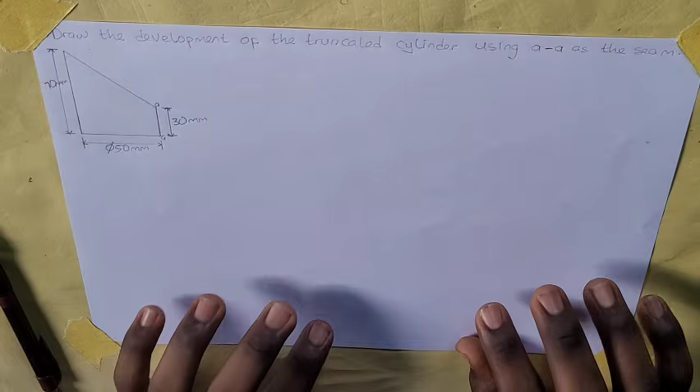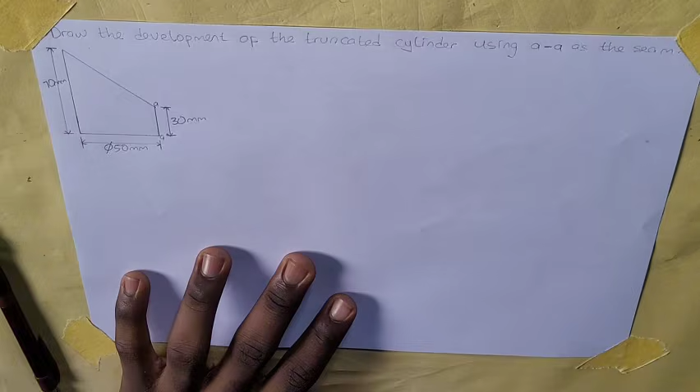Today we are going to look at the development of a truncated cylinder. A truncated cylinder is a cylinder that has been cut, just cut in the middle.

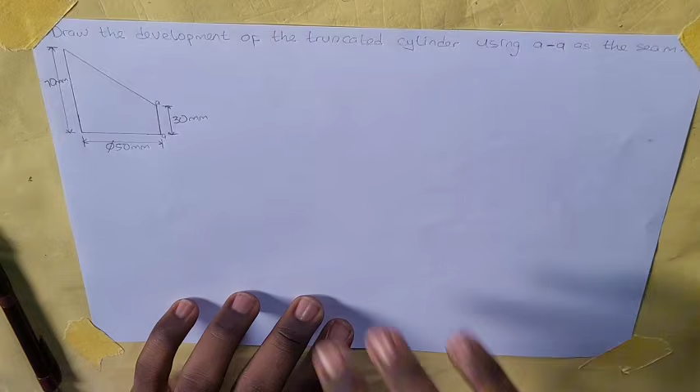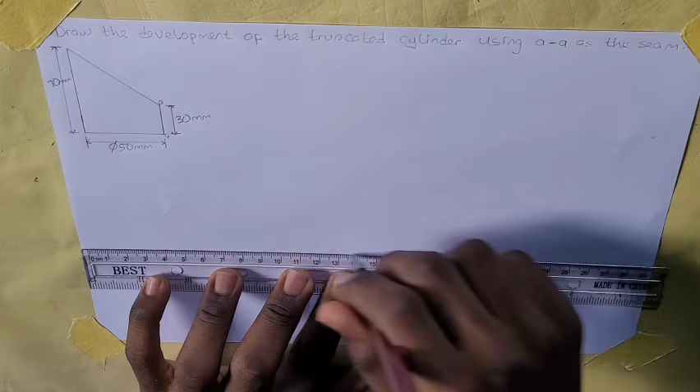To begin, we're first of all going to draw this shape here. To start the drawing, I'm going to draw a straight line. And on this line, I'm going to measure this length as 50 millimeters.

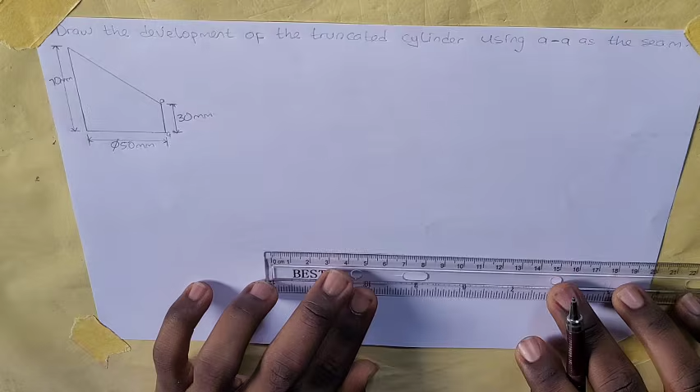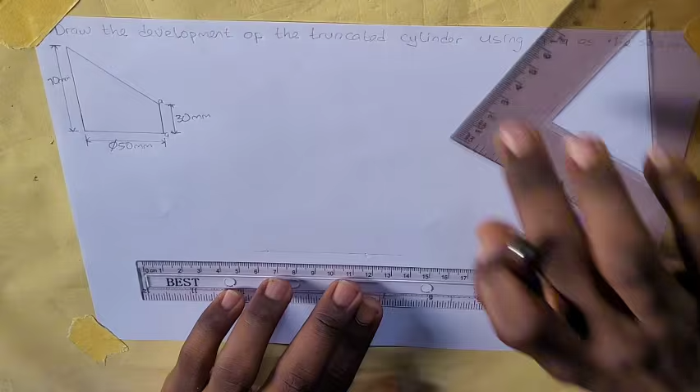Now from these 2 points, I'm going to use my set square to draw two lines upwards.

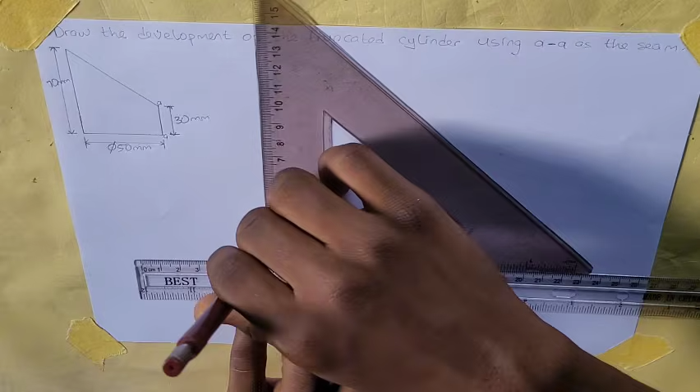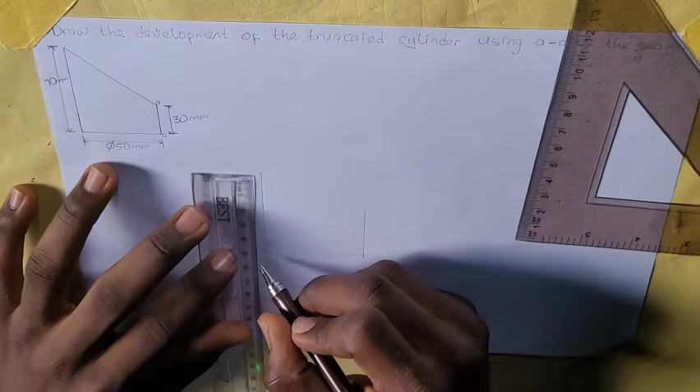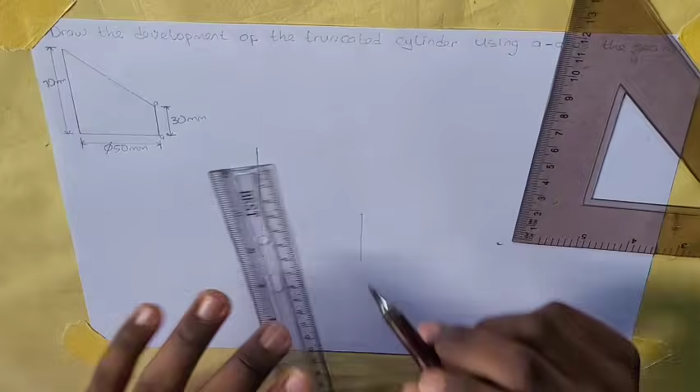So from here to here is 70 millimeters, and from here to here is 30 millimeters. Then I'm going to join these 2 points together. So now we have this shape here.

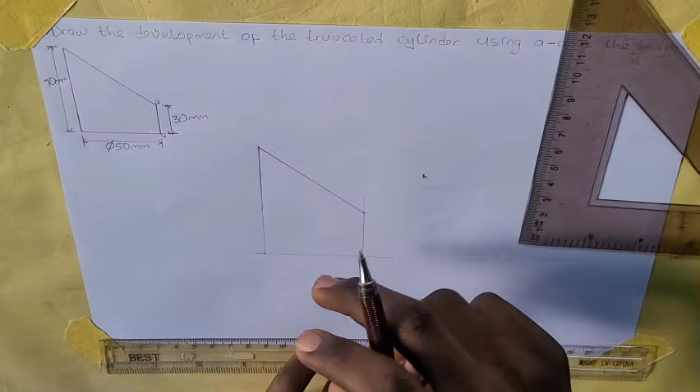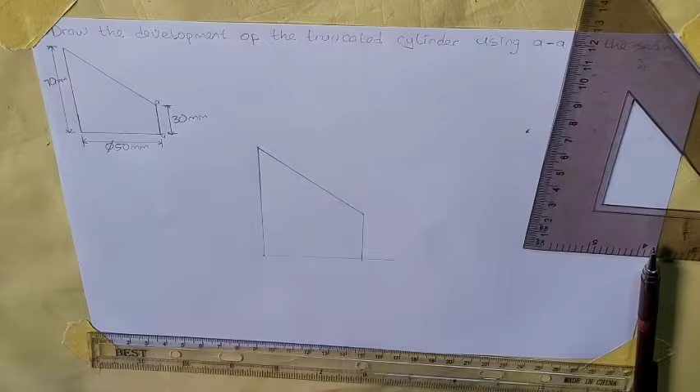This is the front view. I'm going to draw a circle beneath it, which is the plan of the drawing. To draw the development of the cylinder, I'm going to need the circle because a cylinder, when you look at it from the front, looks like a rectangle, and when I look at it from the bottom or from the top, I would see a circle.

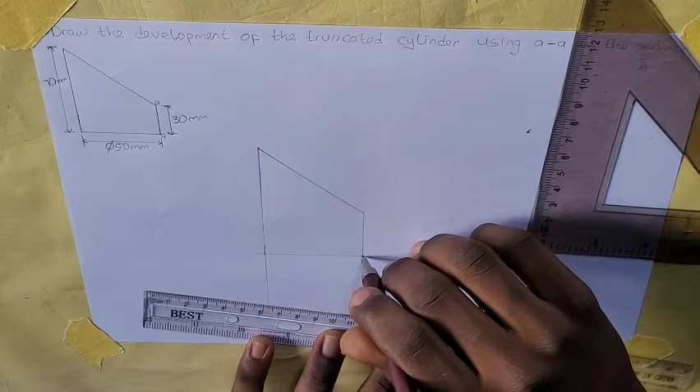So I'm going to extend this line down. I'm going to extend this line down. And then I'm going to find the middle of this line. Since the length of the line is 50 millimeters, half of it is 25. And from 25 millimeters, I'm going to draw a line down.

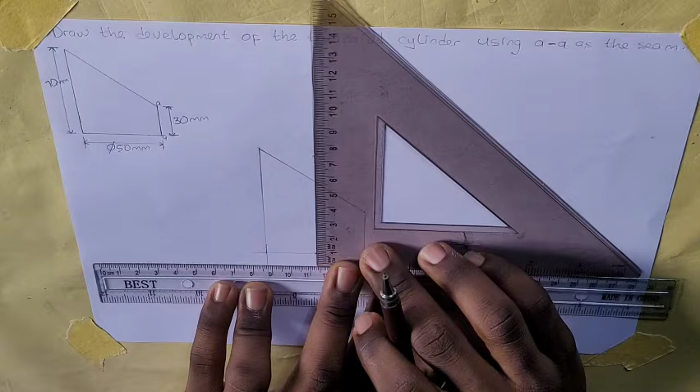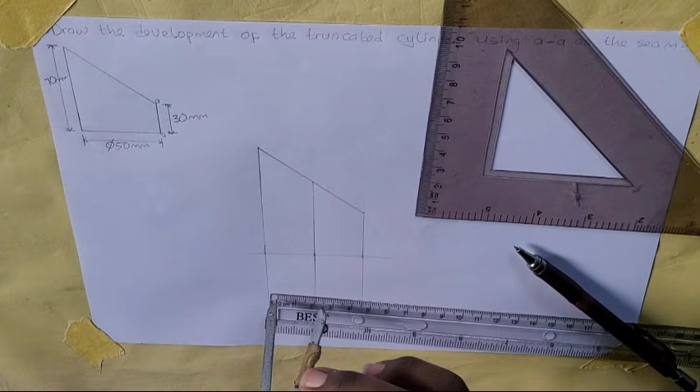So I'm going to use my compass to draw a circle here. I'm going to extend my compass to half the length of this line, which is 25, because the length of the line is 50. Then I'm going to pick any convenient point on this middle line, but it should not be too close to here. Then I'm going to draw a circle.

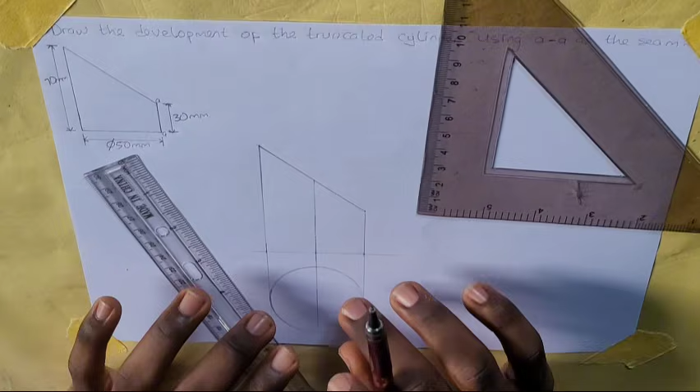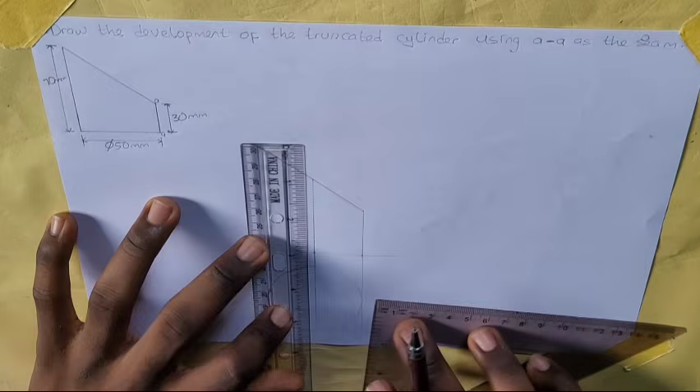Now on this circle, I'm going to divide the circle into 12 equal parts. The first thing I'm going to do is draw a line. As I've drawn this line like this, I'm going to form a cross. Using my set square, I'm going to draw a line through the center. And then with the ruler, I'm going to complete it so it looks like a cross.

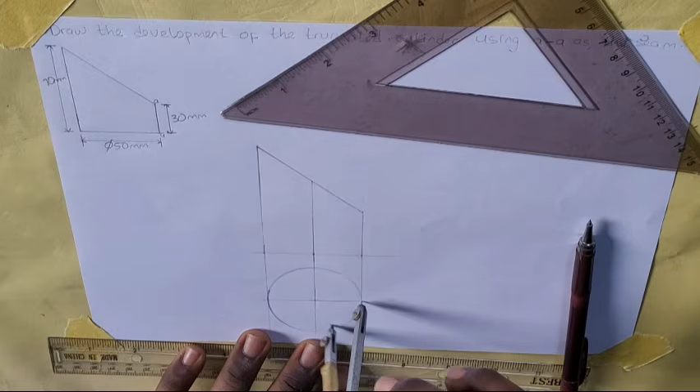Then using my compass, I'm going to extend from the middle of the circle to the edge. That's the radius. I'm going to put it here. I'm going to mark one here, mark one below. Come to the other side, mark one here, mark one below. Come to the other side, mark one here, mark one below. Come to this side, mark one here, mark one below. So I've divided the circle into 12 equal parts.

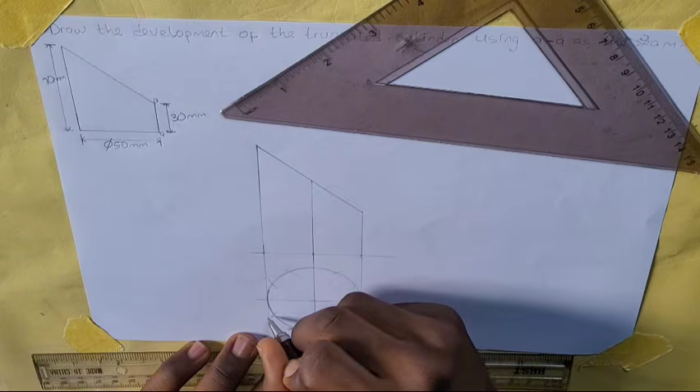Let me number it. 0, 1, 2, 3, 4, 5, 6, 7, 8, 9, 10, 11, and 12. So I've divided the circle into 12 equal parts.

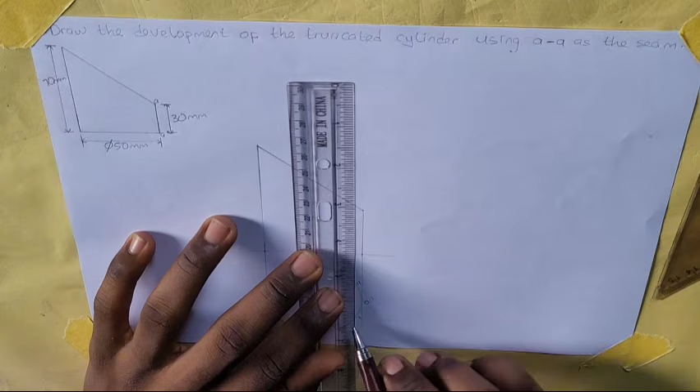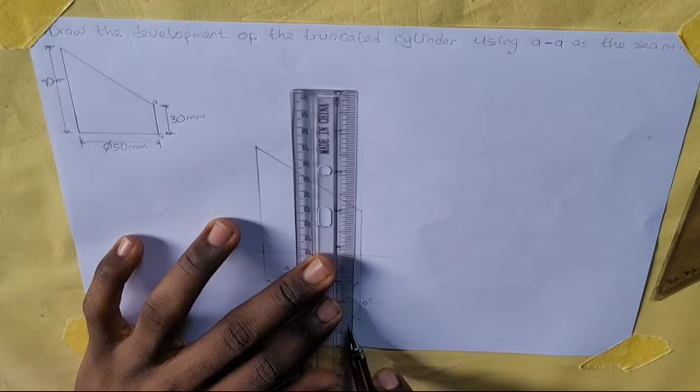The next thing to do is to draw a line from point 11 to this point here. The line must align with point 1 and point 11. So point 1 is where this arc touches the circle, and point 11 is where this arc touches the circle. So I'm going to put my ruler and draw a line through point 1, through point 11, to touch this point here.

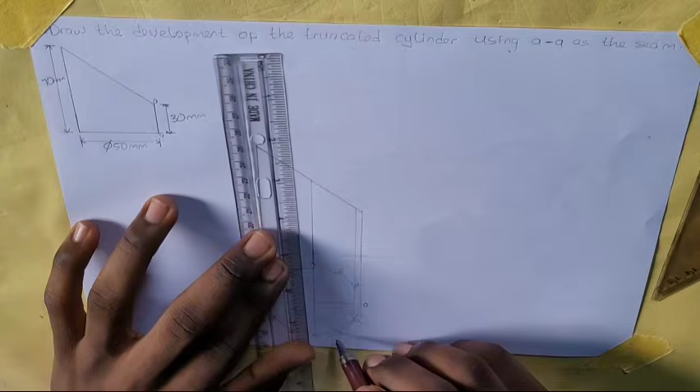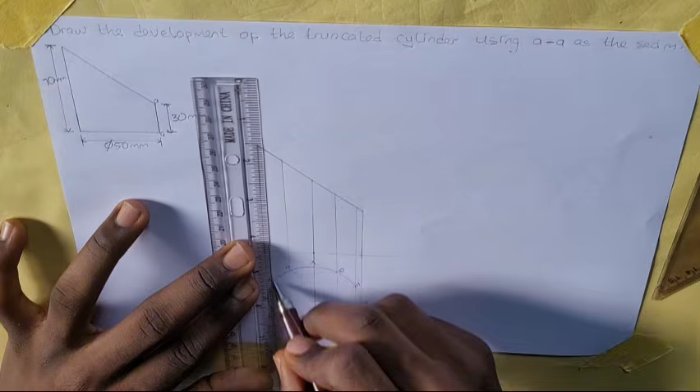I'm going to do the same thing for point 2. I'm going to draw a line through point 2 through point 10 to touch this line here. There's already one for 3 and 9. I'm going to draw a line through point 4 through point 8 to touch the line here. I'm going to draw a line through point 5 through point 7 to touch this line here. So now we have this.

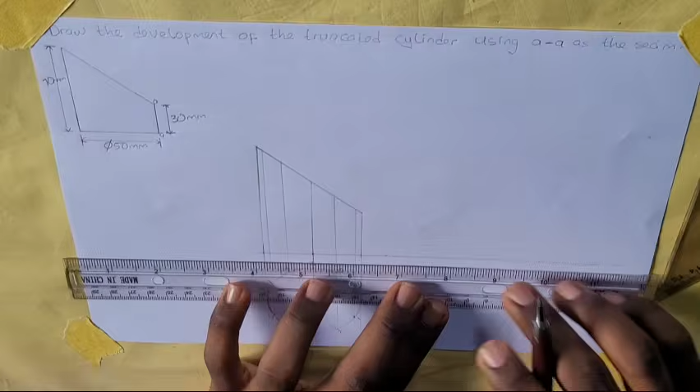The next thing to do is to extend this line all the way here. And then picking any convenient point, I'm going to pick here. Using my set square, I'm going to draw a line from this point upwards.

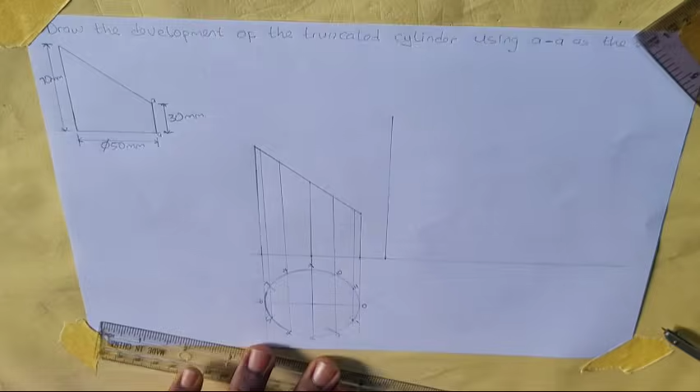Now that I've gotten this point like this, I'm going to use my compass. And I'm going to get the distance from 0 to 1. Now, the distance from 0 to 1 is the same thing as 1 to 2, as 2 to 3, as 3 to 4, and as 4 to 5, and so on. So from this point, I'm just going to use the distance from 0 to 1 and mark it till I reach 12.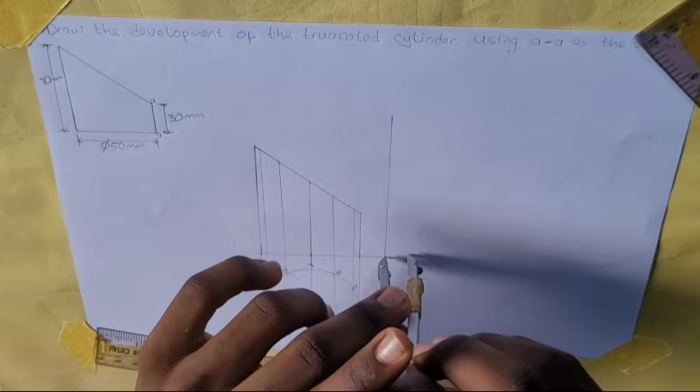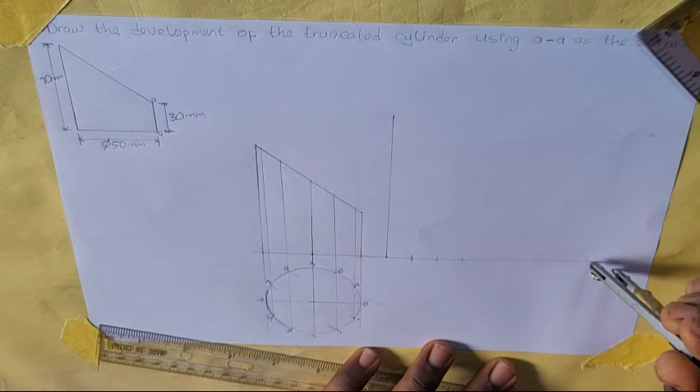So 1, 2, 3, 4, 5, 6, 7, 8, 9, 10. So I'm going to extend this line.

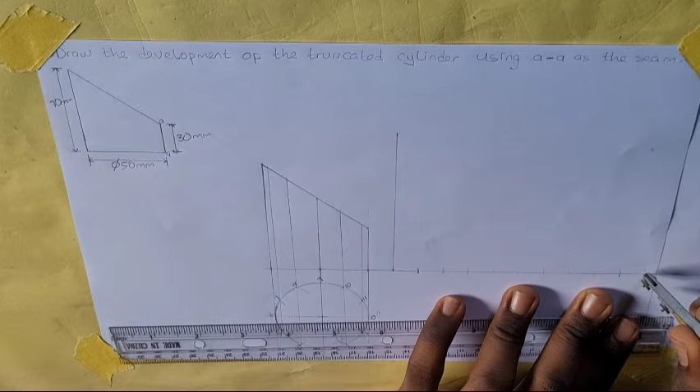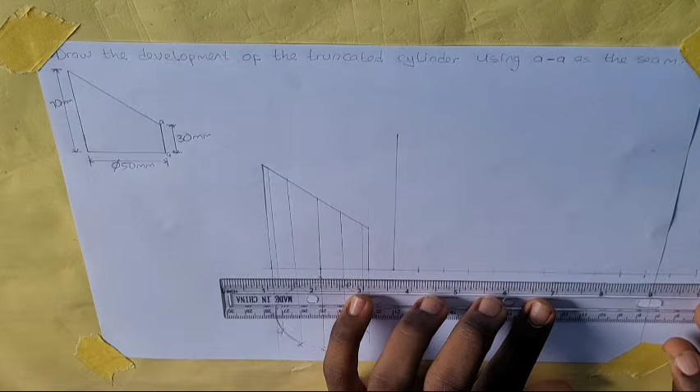So 1, 2, 3, 4, 5, 6, 7, 8, 9, 10, 11, and finally 12. So at this 12th position, I'm going to complete it so that it will look like a rectangle. I'm going to complete it to look like a rectangle.

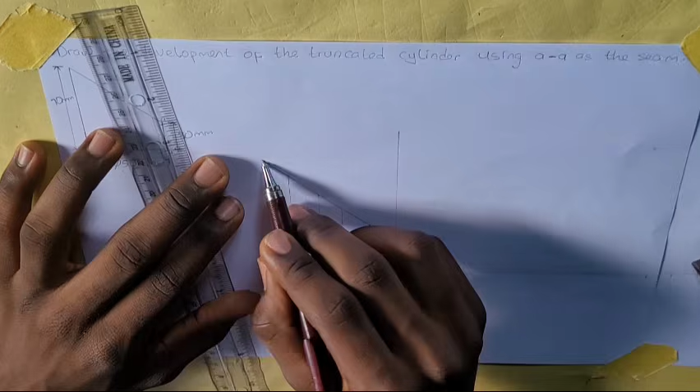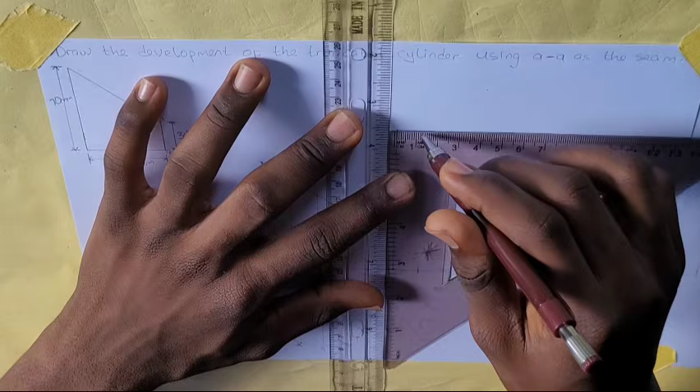Then from this point, I'm going to draw a line from here to enter here. I'm going to draw a line from this point like this into here. But first, let me complete this. The length of this line is not a specific value. I just picked a specific length and then drew it like this.

So let me number these points first. So 0, 1, 2, 3, 4, 5, 6, 7, 8, 9, 10, 11, 12.

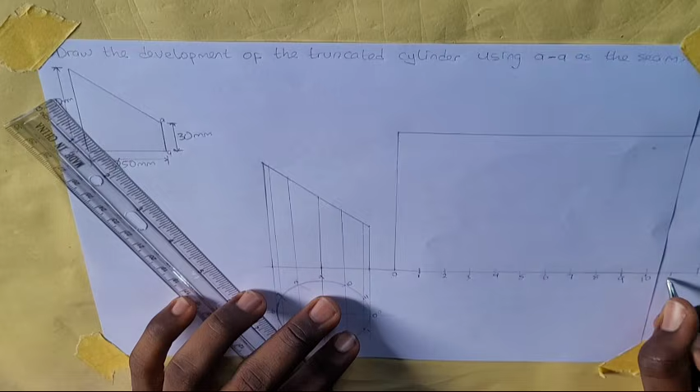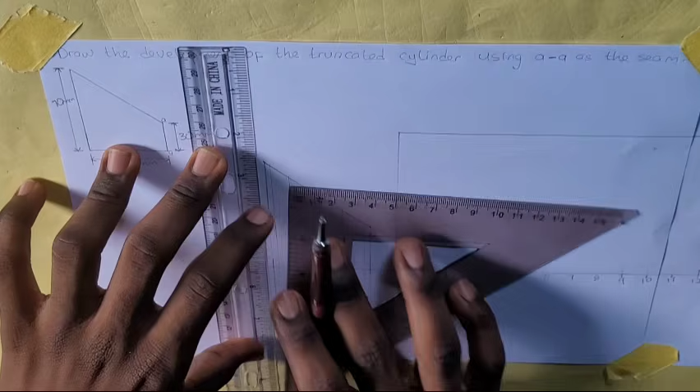After we've done that, we're going to draw lines from every point here into this rectangle. Using our ruler, we're going to make it parallel to this line. That means the distance from here to here is the same thing as from here to here. Then using our set square, we'll draw lines into the box.

From this point, I'm going to draw a line. Then let me complete these lines.

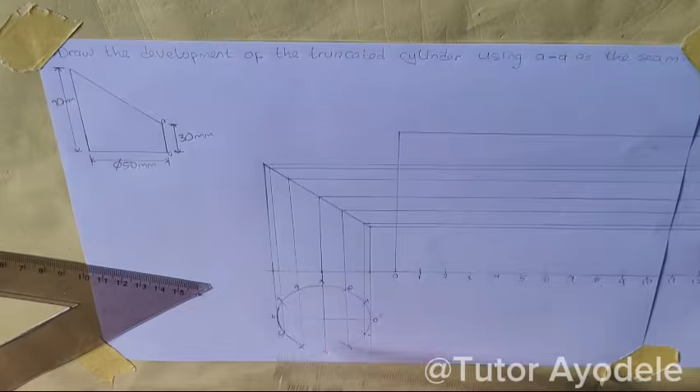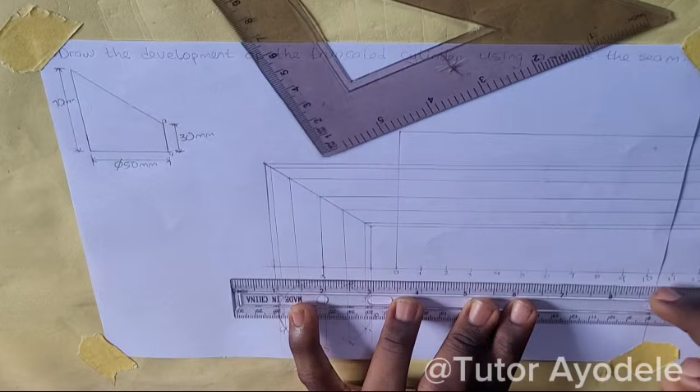Next thing we do is that from all of these points we've marked 1 to 12, we're going to draw straight lines upwards to cross through these points. Using our ruler and our set square. Our ruler is going to be parallel to this line, which means the distance from here to here is equal to the distance from here to here. Then I'm going to put my set square on top of it and draw the line. So for point 1, I've drawn that one.

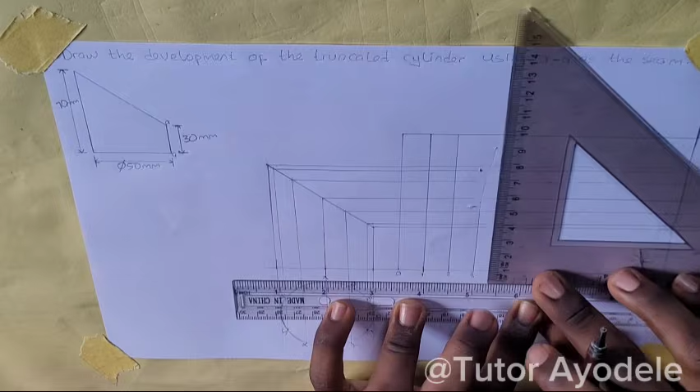For point 2, for point 3, for point 4.

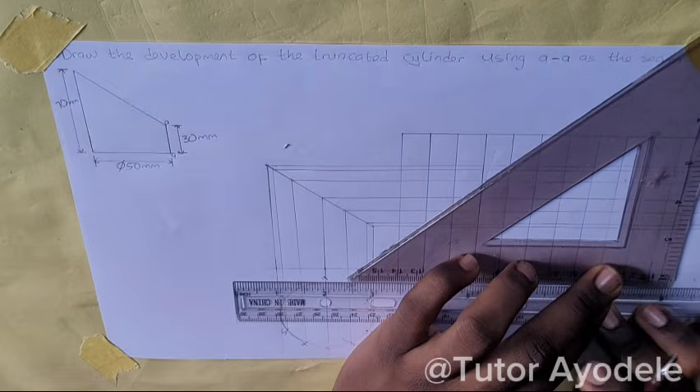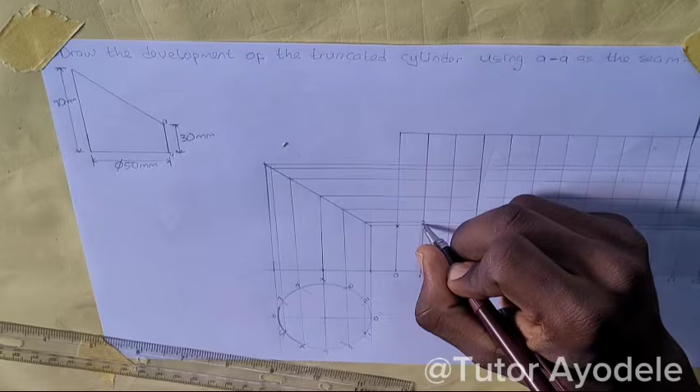Now we have this grid here. Then we start our marking. From point 0, we trace the line, we see 0, we mark it. From point 1, we trace the line, we see 1, we mark it. Point 2, we trace the line, we see 2, we mark it. Point 3, we trace the line, we see 3, we mark it. Point 4, we trace the line, we see 4, we mark it.

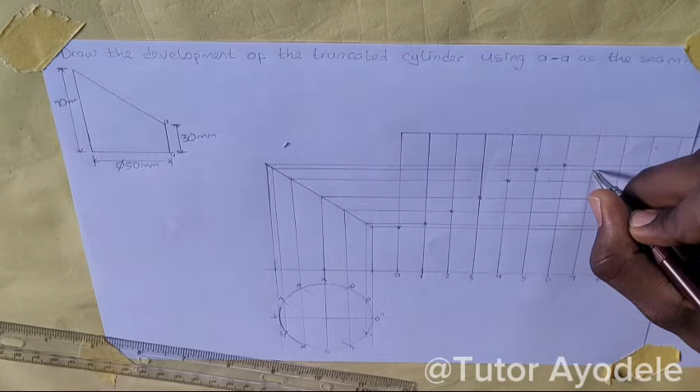Point 5, we trace it, we see 5, we mark it. Point 6, we trace it, we see 6, we mark it. Point 7, we trace it to 7, 8 to 8, 9 to 9, 10 to 10, 11 to 11, and 12, or 0 to 12.

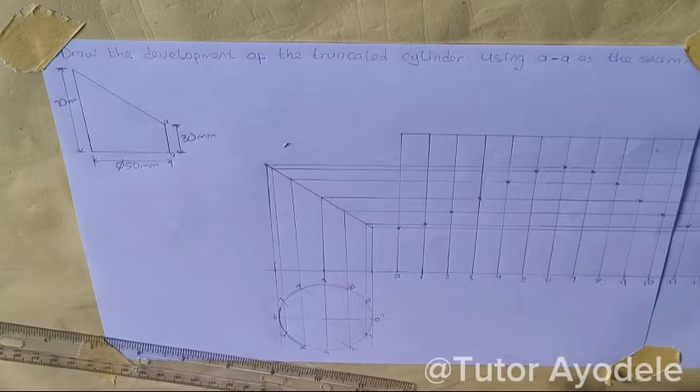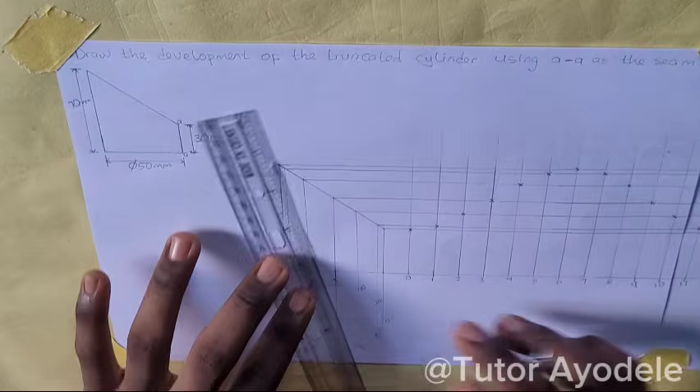So now let me erase this top part. So the development only takes place from this top part to the bottom part. After that, we are going to draw out this curve using our French curve. So we're going to use our French curve to connect all these points together to form the development.

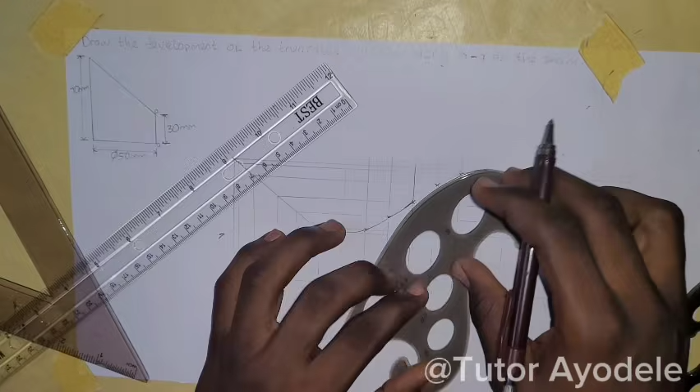And then I'm going to thicken out these lines.

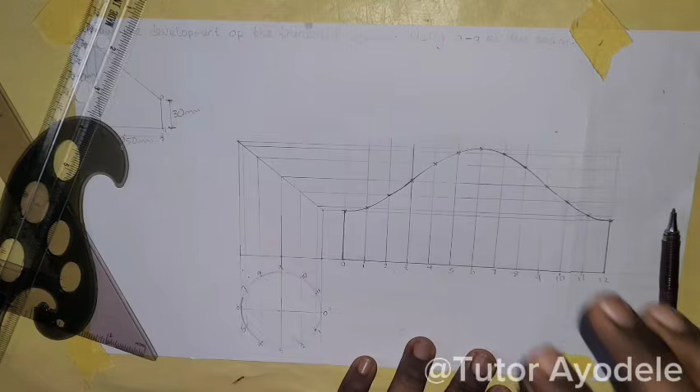So this drawing here is the development of this truncated cylinder. If they ask us to draw it as an open development, leave it like this. But if they ask us to do it as a closed development, we'll have to draw a circle under to show that the cylinder was closed when we're developing it, but we're taking it as open. And then the remaining thing now is to dimension our work.